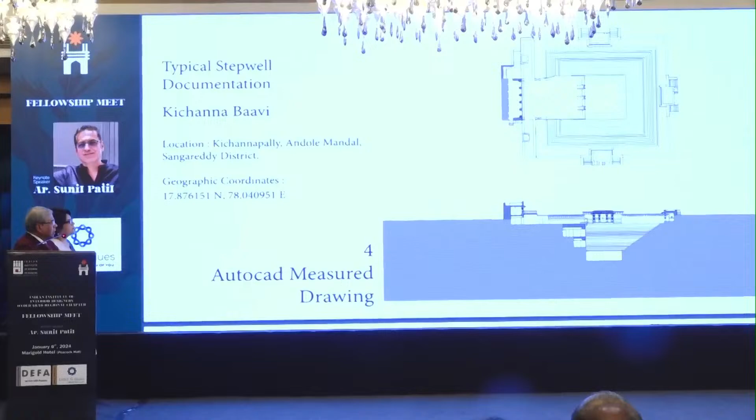We get the geographic coordinates. And the drone mapping in this case was done by IIID Hyderabad, and the 3D printing was done at the university. Then, of course, we make a detailed drawing, a typical measured drawing, plans, sections, all the details that we find, architectural details.

And then we have a comparative table of stepwell parameters. So this gives a lot of data, and all of them are listed under this. So this forms the nucleus of the research that we do.

And then we record some of the stories. Most of the facts that we got were actually first-hand from primary sources. And in many cases, we had no ways of corroborating them. But nevertheless, as people who are researching, we have recorded those stories.

So Aparna will take over from here.

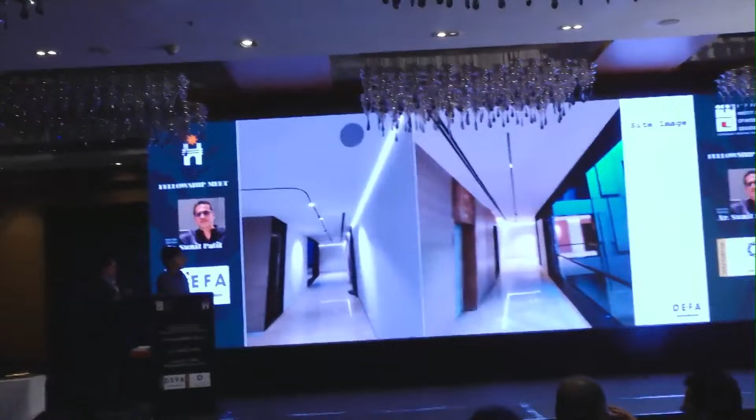These are some of the renders and the working that we do. On the right-hand side, we have the layouts; on the left-hand side, how it is actually going to come up. Some of the areas we have done, the concepts - these are the lighting design renders that we do. Some of the site images that have come up - these are all the installation images, actual site images that we have.

In general, we have various brands, approximately 40 brands from different countries across Europe, UK, Australia, depending on which kind of brand a client is looking at. These are some of the installation images of our corporate and commercial offices and spaces.

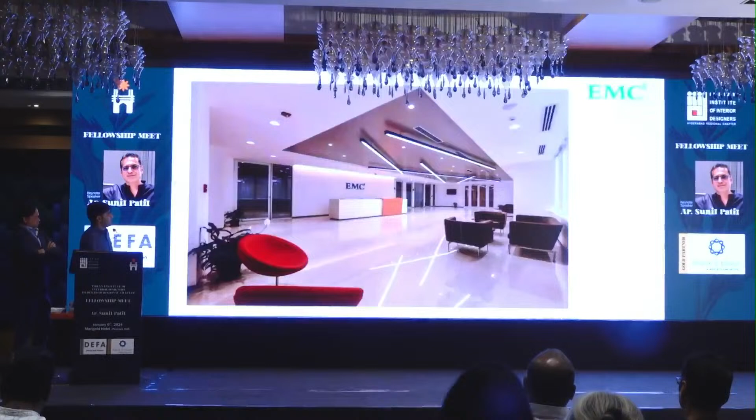We would like to showcase one video of an upcoming product. We have a manufacturing plant in Vasai, and our manufacturing company name is L-Code, which caters only to the brand. We have this video coming up showing the product lineup. Can I have the video, please?

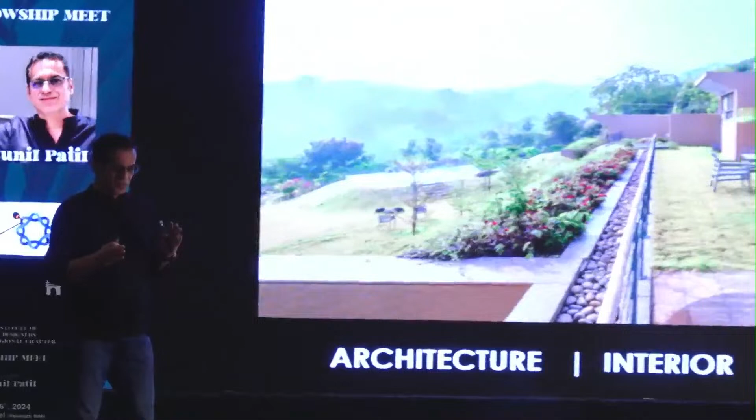As I said, it is very difficult for me to draw lines between architecture, interior, and landscape, because I think they have to complement each other. It's just one. So whenever I say architecture, it also includes interior.

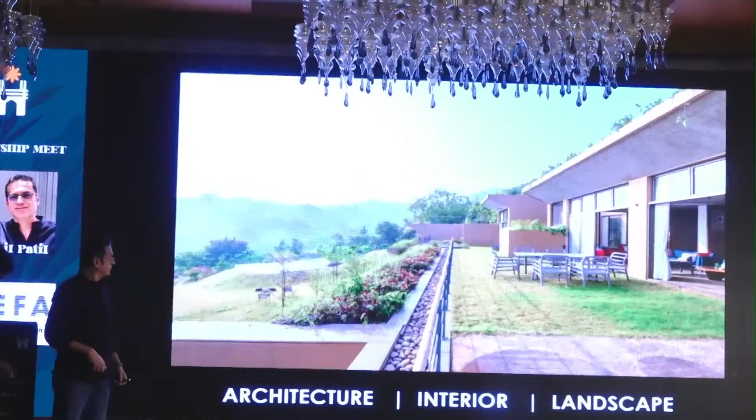So architecture is all about designing of space. And we believe that the space has to be in harmony with nature, because whenever you go to, for example, a multi-restaurant hotel, you tend to sit in an outdoor seating, however decorated the indoor restaurants are, because your body or mind tends to interact better with nature than man-made spaces. So we think the space has to be in harmony with nature. That's what our philosophy is all about.

When you design a space, you cannot conceive it without the thought of the interiors. Unless you know what the interior and layout are going to be, you cannot decide the fenestrations, where the space flows from one space to another. So I think every architect has to be the interior designer first. Without having the thought of interiors, you simply can't create that architectural space or form.

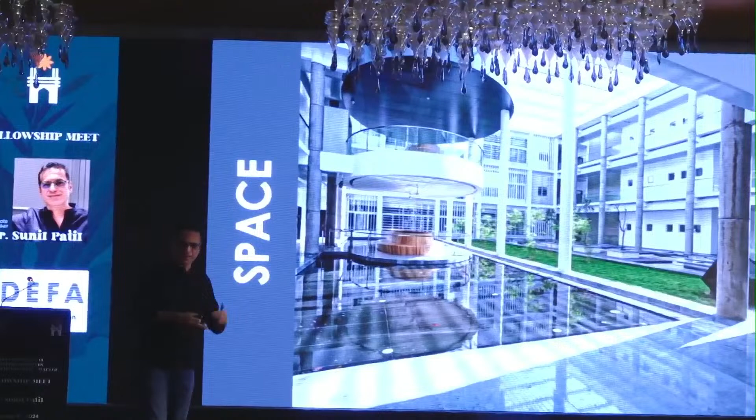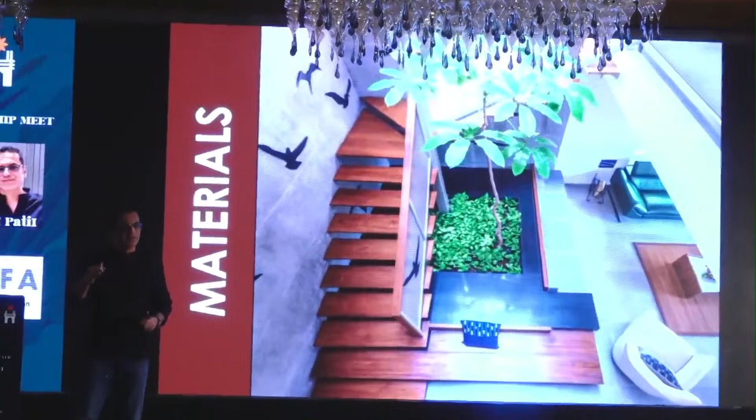And the materials. Now materials are very important. They give character to the space. It's just like music gives character to a film - imagine a scene like a night, a palace on the lake, with wind and breeze flowing. If you give romantic music, the scene will be romantic. At the same time, if you give horror music, the scene can be horror. Similarly, materials can make your space romantic or horror. So it is very important to choose the right kind of materials. That's the most important thing.

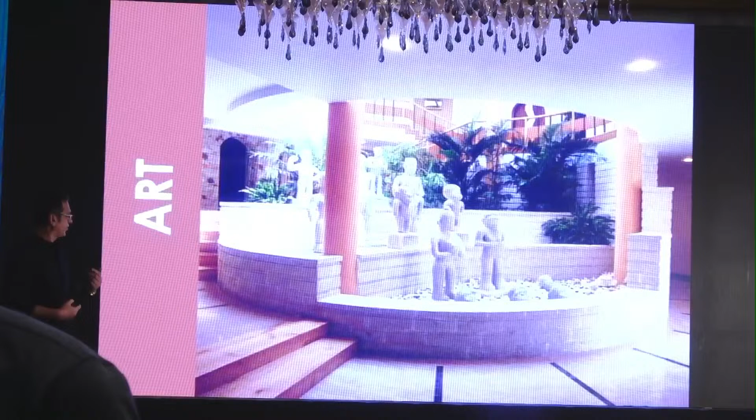Of course, sustainability - my today's talk is not about sustainability, but I would just like to say a few words about it. It is not rocket science to achieve sustainability in your building. If you just follow the simple basic principles of architecture which we've been taught in our colleges, I think you can achieve a lot of sustainability. So what is it all about?

It's about creating a comfortable space using minimum mechanical energy. That's what it is. If you just design with absolute natural light and ventilation, so that in daytime we don't have to really use mechanical energy, I think that's enough to achieve a lot of sustainability. But what happens is we cover everything, then we air condition it, and then we talk about generating energy from solar or wind. I think we have to look at that.

It is not about achieving those rating points by various rating systems. I think it has to be inculcated in the planning itself. Of course, we have also done a lot of projects which are 5-star rated by GRIHA or even IGBC, but sometimes for government projects, unless you stamp it, they don't accept that it is a green building. Otherwise, every building has to be a green building itself.

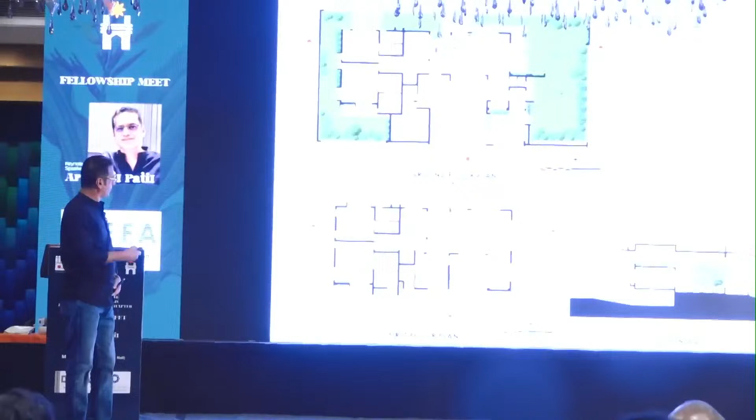This is a house in Pune, which we call the long house because the massing of that house is like that. It is a G+1 structure where the ground floor has living room, dining, and 2 bedrooms, and the first floor has 2 more bedrooms and family areas. The living room has a double-heighted volume.

So this is what it is. This is the front facade. Very simple elevation treatment, slick slabs with some penetrations, some punctures in that, and horizontal louvers with pine wood.

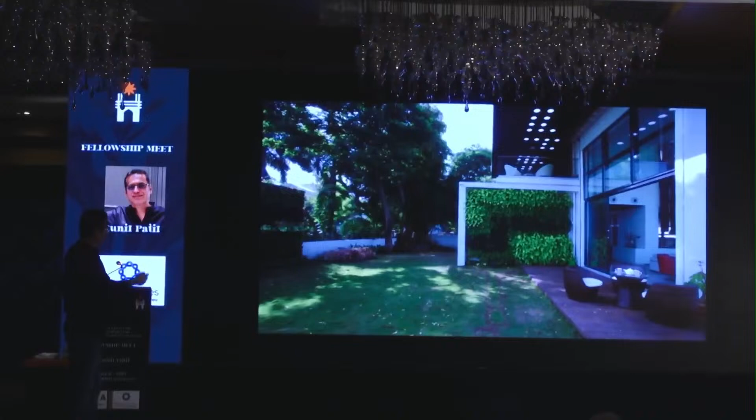This is the entrance. One more view of the garden where the living room walks out. This is the living room of that house with double-heighted volume.

Is this thing working? Yeah, let's check on this. Oh, because of that, I thought it was going automatic like that.

This house was very simple with gray color ceramic flooring with some patterns on that, and the double-heighted volume with large windows. When we treat double-heighted volumes, it's very tricky to treat the walls, so on the upper floor also we have taken some elements which come down.

This is one more view of that, the backside of the staircase. We wanted to have some kind of mural there. But then we got the idea that we could use old sari printing blocks, and it made a very nice mural for that.

This is the dining with kitchen and the breakfast table. On the other side, what you see are some curated artworks, which you'll see in the next slide.

Those are the curated artworks. There are 9 pieces of paintings which can be reversible and make different combinations.

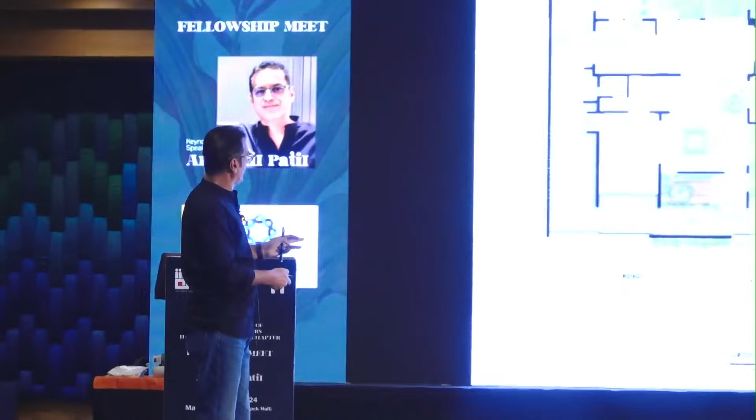So we call it stepped house because the house is staggered at the landing levels of the staircase, like steps. At this level you see living, family area, dining and kitchen, and the upper level has 2 more bedrooms with double height there. Above that are 3 more bedrooms, so there are about 7 bedrooms in this house with a terrace on top.

That's the front facade. We used Tandur stone cladding for the walls, and what you see are the horizontal louvers. You see the entrance is treated with wood, and the entrance becomes part of that huge wooden mural.

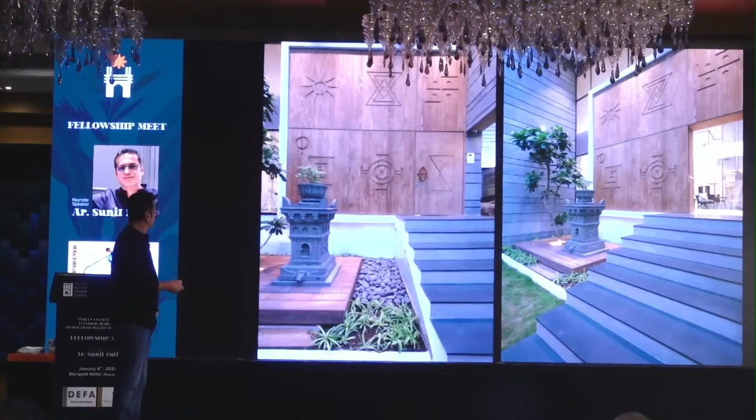That's Accoya wood, which is available there. That was the view from inside, how it looks - again a very simple plain ceramic tile with gray color in combination with wood and white masses.

There is a pneumatic lift here. Just showing a few more slides of that - that's the pneumatic lift which takes the family up to the top and the living area.

I love to have those spaces flowing from all directions, horizontal and vertical, through various fenestrations. This is one more view from the family area to the living room.

The plot was very small, so there was hardly any scope for a garden. So we thought of having a vertical garden on the compound walls, which gives that effect.

There's a dining area with walkout, and what you see is the compound wall with vertical garden. On the left side is the kitchen with this kind of breakfast table there.

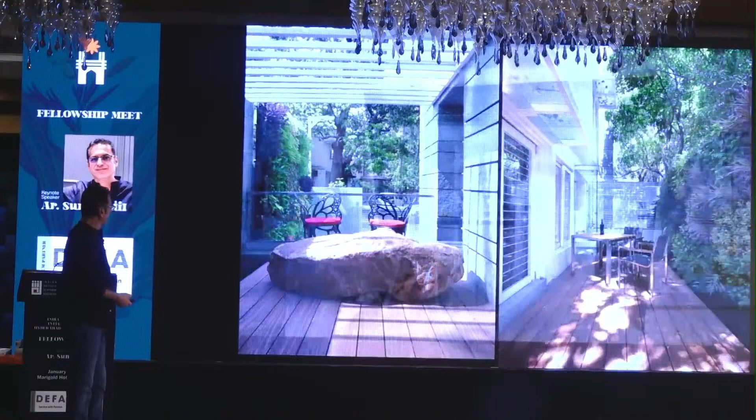And we used margins for landscape. That is the kitchen with this breakfast table - it becomes a nice feature there.

These are the setbacks which we used for gardens. And then, of course, treating those rooms was another challenge with different themes. So we used different colors for that. We made one blue room, and then...

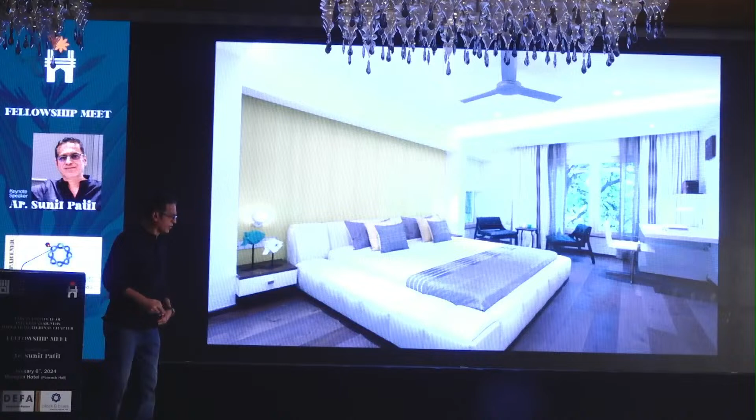Then a yellow room with very simple treatment, wooden flooring, and most of the artwork also matched to the theme of the room. So these are the themes of the rooms. There's one green, and you see that all the fabric is also designed to suit that room—the curtains, the pillows.

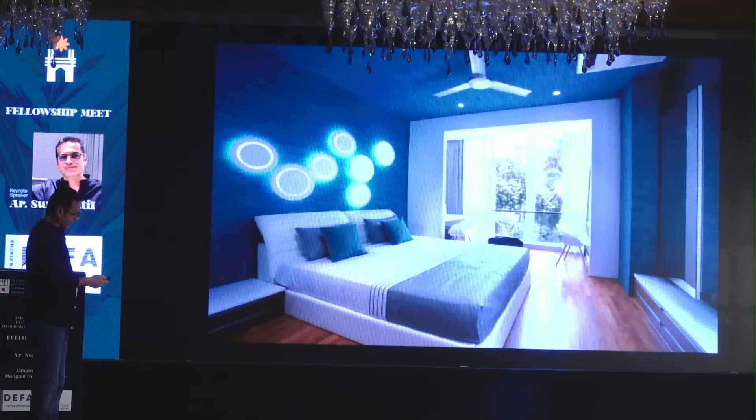Even our fabric designer has used the same pattern on the pillows as well. This is the uppermost terrace.

This is a very interesting project. We call it Earth House because it was supposed to be a weekend house on the outskirts of Pune. But Pune is growing so fast that by the time we built it, the client said he'll use it as his main house. And it became so good.

The idea was that it's on a hillock, a place called Bhugaon—most of you know Pune well. We did not want to disturb the contour of the hill, so we thought we could do something where the structure should not look like an alien structure just landed on that hill, not going with the natural surroundings.

So we thought of using the contour of the hill itself. Conventionally we could have done this differently, but we decided to design it such a way that it goes within the profile and contour of the hill, and it is not seen much.

That gave us a lot of opportunity to create courtyards and terraces. It is actually just a ground structure, but it has a huge, massive staircase because, as you know, it cascades down along the hill. This is the section and the terraces, shown in detail.

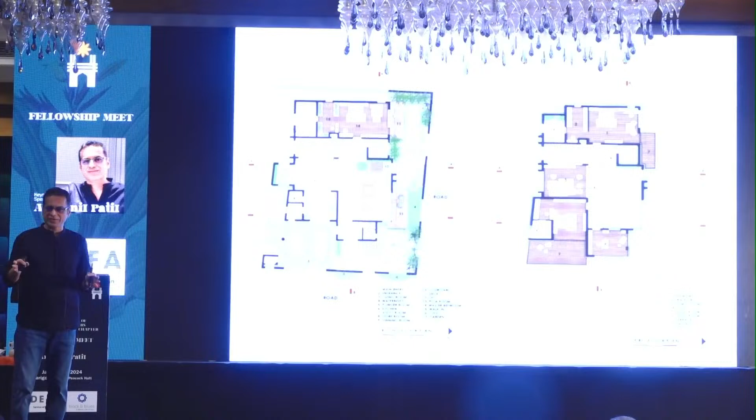This one more house I'm just going to show you. It's in Satara. It's a G+2 structure with again a similar kind of thing, having a small plot but more requirement - a typical requirement of a town or city. So we had to accommodate everything, and it has a G+2 structure.

We see that section. The living area has a double-heighted volume, but the courtyard continues with a green wall, a vertical garden throughout the height.

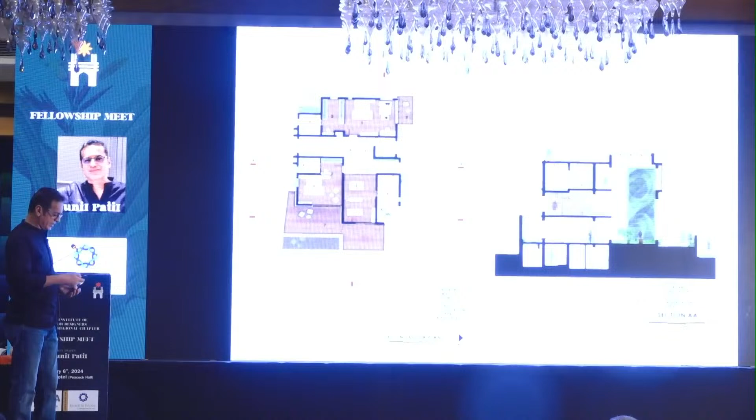So it is a very tricky thing in India - we have to have breeze inside but not that radiation from the sun. So I think in most of our projects we find some kind of sun breakers in the form of finishes, louvers or fins. This is the view of the living room with Italian marble flooring and more wood.

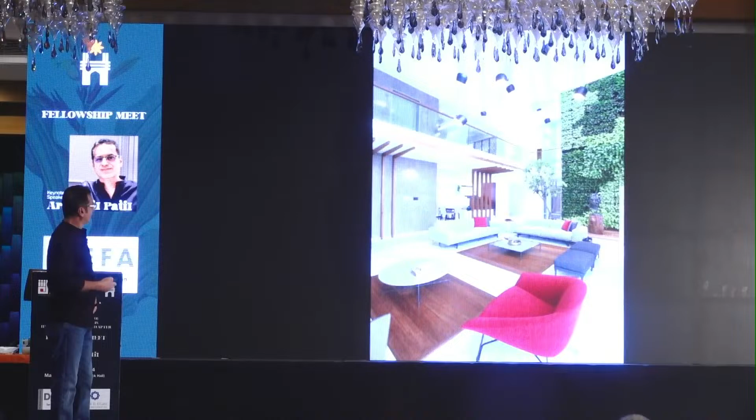Furniture is also imported here. And this vertical garden, which goes right to the top - we have been experimenting with vertical gardens for more than 20 years now.

So now we understood how to do it so that it doesn't dry up, because initially we used to get carried away by colorful plants, but it doesn't work for inside areas. There are specific plants - if you plant those, it works well. Just one more view of that.

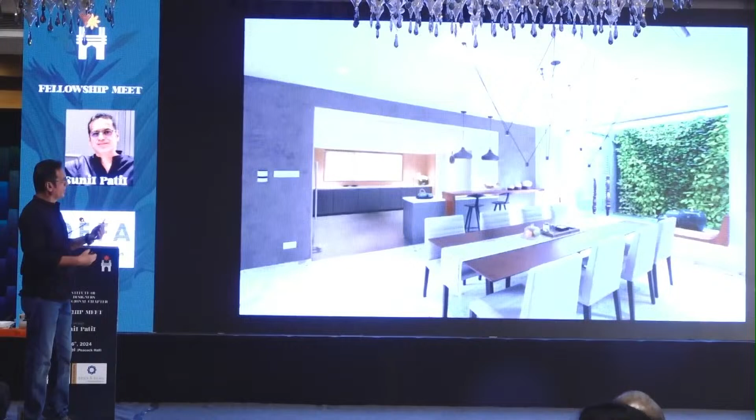That's the kitchen area. And then there's a nice staircase we worked on a bit, which itself forms a piece of artwork, with colorful wooden treatment to that. And that's the staircase which goes up.

The bedroom - we had a partition between the bed and the walk-in closet. There was a huge painting done on site by a very renowned artist called Sanjeev Sangpal from Maharashtra.

So this is another bed which has a walkout. This is the daughter's bed with some mirror on top and then some pink sofas.

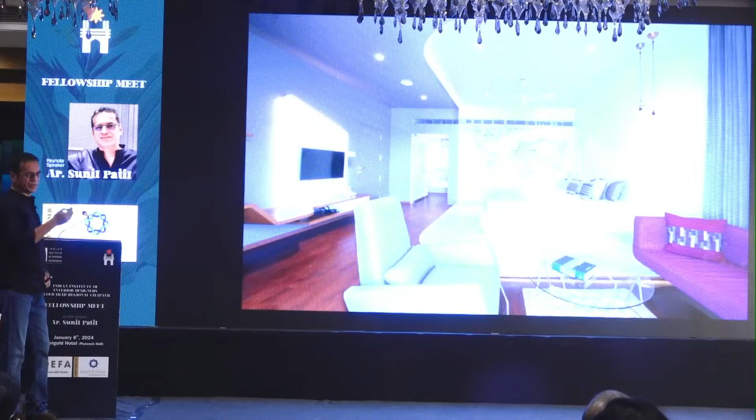The home theater - he wanted to have a home theater for almost 28 people. And that's a spa there.

Now this is our recently done project. See, if you see my presentation from about 20 years back, I used to show residences designed on 35,000 square feet of a plot, 50,000 square feet of a plot, and that is there in most of the books. But as I started my practice in Pune and we started working in metropolitan towns, the plot size reduced to 3,000 and 5,000 square feet.

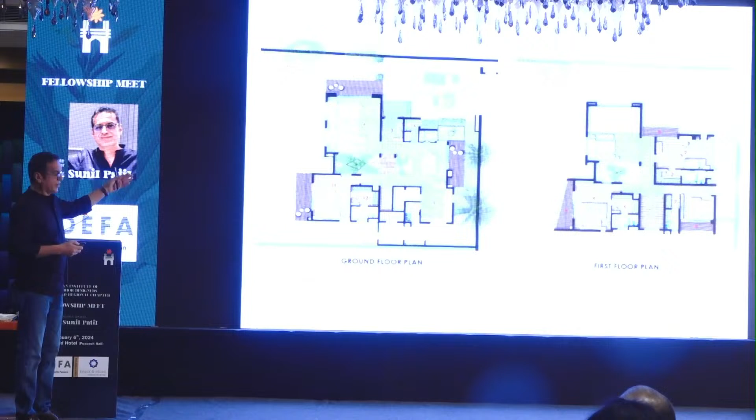We call it the house of floating masses because the masses are designed like that. There are three materials we used - one was stone masonry, the other was this strand-woven bamboo cladding, which works well for the exterior. Just another view of that.

Most of the structural work behind these very slick pergolas is because we have the engineering department. Most of it we have done in-house, because you know that if you go to structural design consultants, what their answer is.

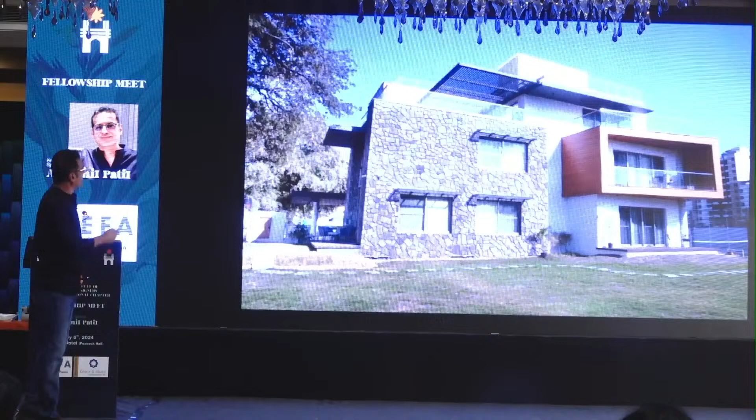This is one more view of that house. This is the view from the walkout when you look into the living room. The space we see is the family room, which again looks like a floating mass there. Just one more view of that.

This is from the other side, like you walk out, and you must be observing there are no grills. We have a lot of walkouts in most of our projects. Clients do insist on grills, but we came up with the idea of shutters which come down at night and are hidden in the elevation treatment, so they are automated with time.

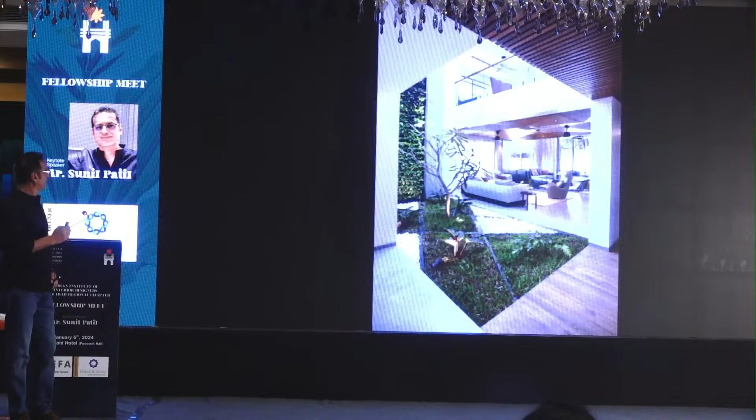Just a view through the courtyard to the other side. As I was talking about, I love to have this interaction amongst various levels through spaces.

Yeah, these were my residential projects. So now I'm going to show you some projects - this is an industrial project, which is also an award-winning project.

This is a winery for Fratelli. You must have heard of Fratelli wines - it's India's costliest wine now. It is an Indo-Italian wine.

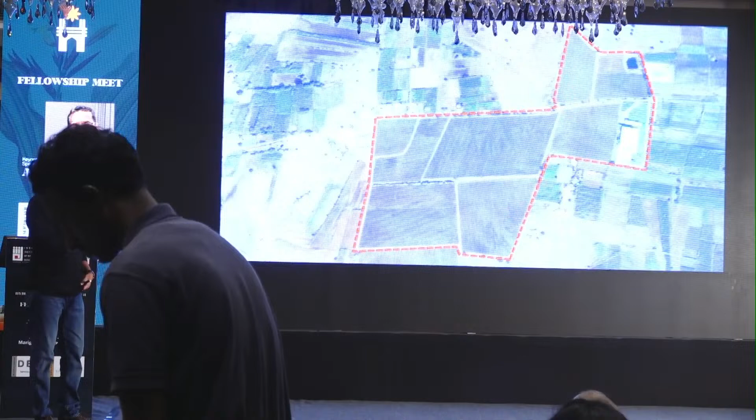So this is that 40 acres of vineyards, and there are another 100 acres nearby which is also connected to this. You know that the wine making process requires things like harvesting, crushing, fermentation, then aging and bottling.

It requires this: you need a tank hall, a bottling plant, and a cellar for wine storage. This has the highest capacity in India - it produces 9 lakh liters of wine every year.

Then the administration block with a wine tasting lounge and office, and we wanted to have a guest house because this place is out of nowhere - even if you want to buy mineral water, you have to travel about 50 kilometers. So we had our own guest house there.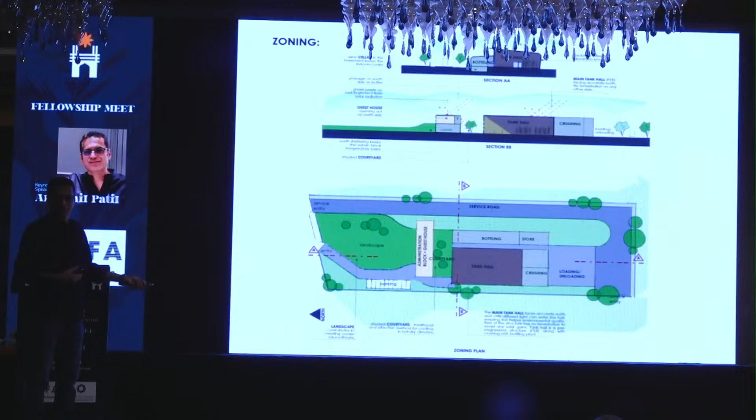The real challenge was that the tank hall is not air conditioned, but those tanks are jacketed, and we had to maintain that temperature, so we had just 3 layers of roofing there. We used technology to support huge spans with very sleek members, and we designed a corridor on the south side and kept the north side open, so it was climate responsive architecture as well.

So this is that winery you see from a distance. One more view - there is office below this.

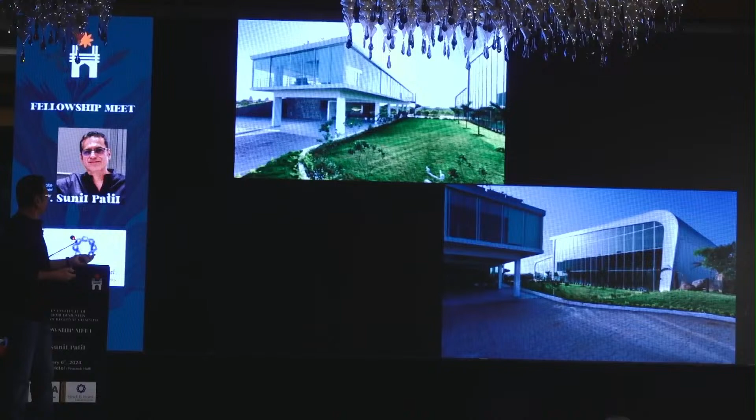Between the administration office and the manufacturing unit, there was a nice green space. The cellar was designed so they did not want direct access, because it's never like that. You have to go through something, so that they open it once a month or once in 2 months. That is the cellar.

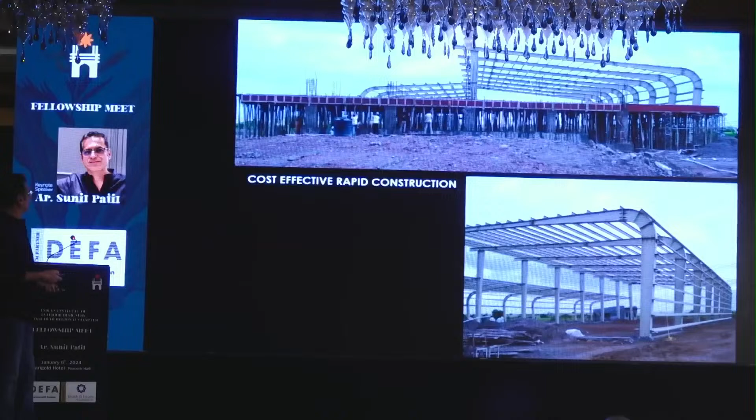As I said, it had to be done in just 4.5 months. We used PEB structures, and the superstructure was done in the factory while the foundation was done on site simultaneously, and the project was completed in 4.5 months.

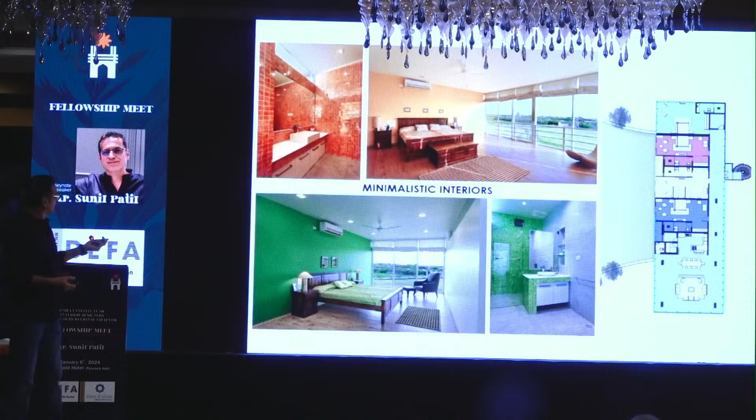The interior was very simple. They wanted classical furniture, which we never use in our projects, but since they wanted that nostalgia with wine, we got this furniture from Italy. The Italians are very conservative about spending, so it's not just India, but abroad also. We had to do everything in a very short budget, so only with some colors we made those things.

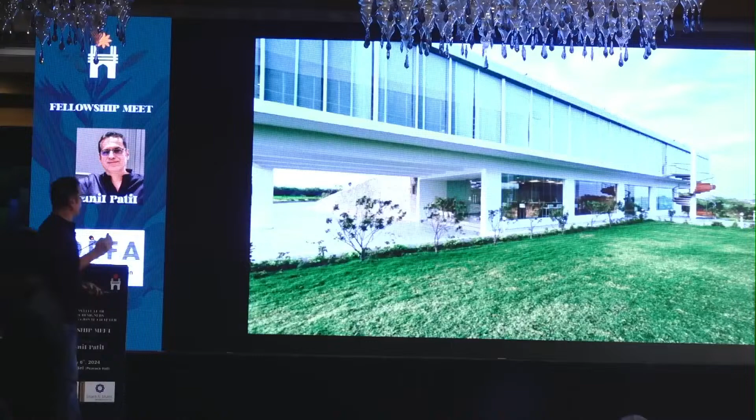This is the wine tasting area with simple Kota stone. That's another lounge on top of that, which projects out over the winery and vineyards. Just one more view of that. This is how it looks from the main entrance.

Actually, there is one very funny story. This was completely designed as a cantilever, and I'm going back to that. We completed this project.

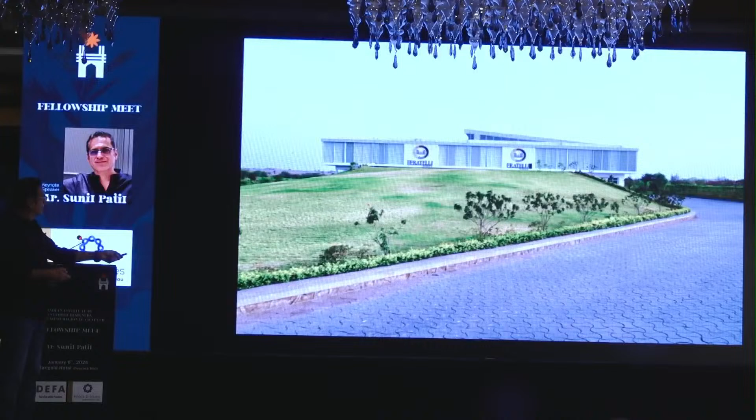This column which you see was not originally there. We completed the project, and after a few months, that client was behind me all the time. He said, 'put a support here.' They were feeling uncomfortable. I told him my structural designer had done it, don't worry. Then the project got finished, and I didn't do photography for 6 months.

After 6 months I sent a photographer, since I couldn't go myself because I was busy. He did the photography and showed me the photographs, and I was shocked. I said, these columns were not there. I called the client and my structural designer, and he said they were insisting on it. Look at the column size also, it's very funny, see.

So it's a psychological column. At night, it looks like this.

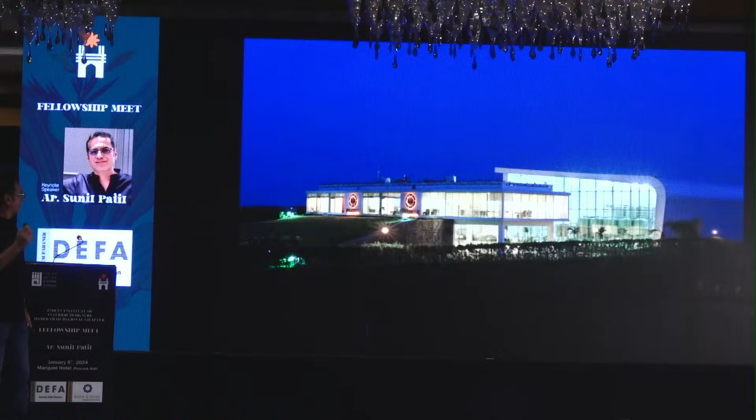Shimmering wine. So this is a government project, a circuit house, VVIP circuit house, which we did in Pune. You know what a circuit house is all about. It's a big challenge. When you think about a circuit house, what comes to your mind?

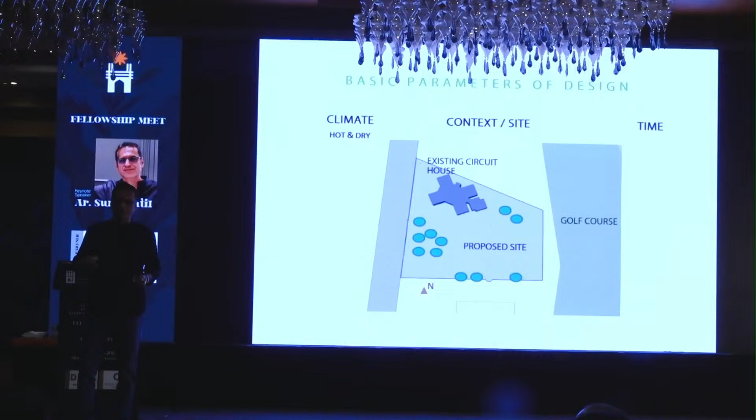A lot of chaos, a lot of people, VIPs, bureaucrats, security guys. When some minister comes, the entire entrance area and porch is flooded with people and it's a chaotic situation. We wanted to avoid that. So we worked a lot on the circulation of bureaucrats, ministers, security personnel, and the public as well.

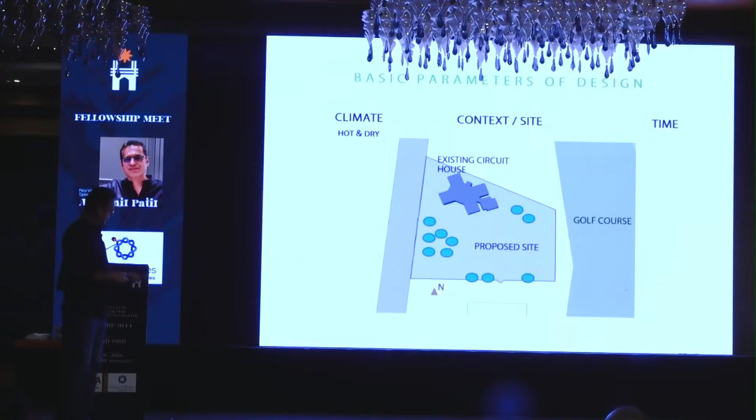So this was the site here. One side was a golf course. This is a very prime location in Pune camp area. This was the existing circuit house, designed in a post-modernist style, and this was the proposed site for us. There are a lot of trees around also. And then this was the site.

As you know, you require the marginal space for fire brigade movement. After that, this is what we could get as footprint. We did not want to disturb these trees, so we decided to build only in this area, so the footprint was not much.

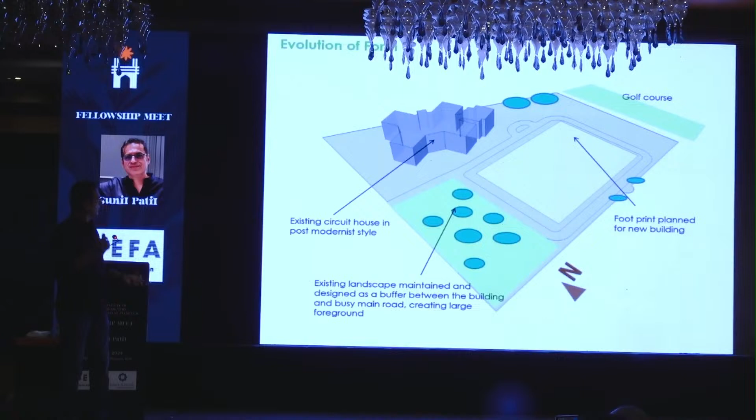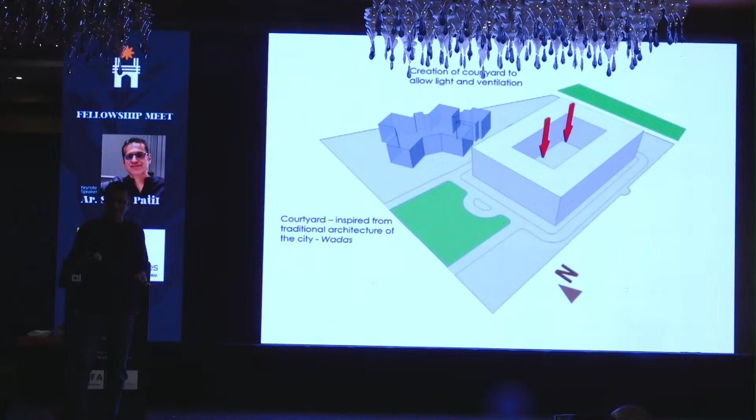Then we decided, when we create a block, that we do not allow any space to be more than normally 8 meters from the exterior face, because light travels 8 meters normally. So it automatically created that courtyard for this house. Again, the courtyard is a vernacular feature, an ethos we have been using in India for ages, for various reasons we will talk about.

Then we just cut it from the west side, because the west side is normally very harsh, so if we can avoid any function facing west, we should do it. So we did that. And then there are 3 vertical cores.

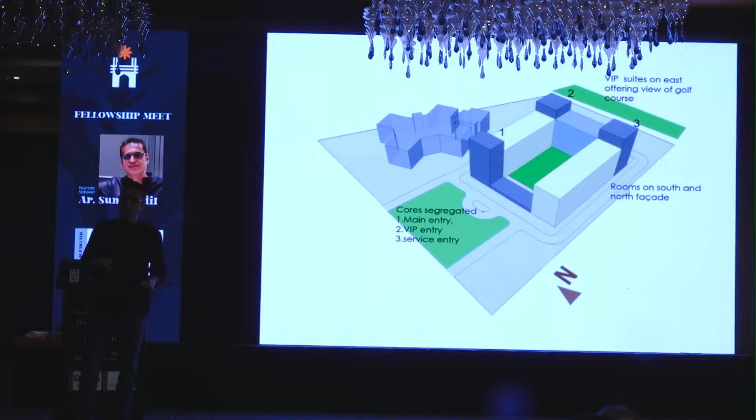This was the VIP core because there is a helipad on top of that. The idea was that when ministers come, there's a lot of wastage of energy, labor, and fuel, because they come with a huge convoy, and 10 to 15 officers are unnecessarily employed there. So we presented to the collector that we will have a helipad here, so he comes by chopper and just goes, and the city doesn't have any pollution, and whatever risk of flying is his own. He was convinced, because the collector is the first person to go and welcome every minister, and then we got this done. You'll see that later on. So all the rooms were actually located on the south and north facade.

Sorry, just going in reverse, yeah.

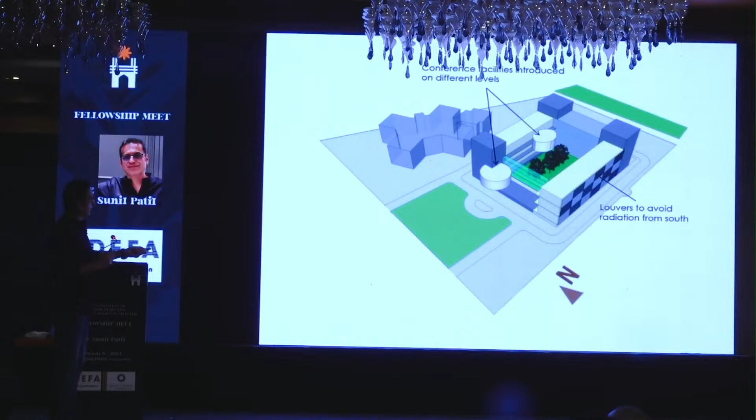We had some connecting bridges which were connecting these two wings, and then there were two conference halls of different capacities, 20 and 40. When we work with government projects, another challenge is that the brief from the government can come anytime, even after constructing half the structure. So this is what happened with this project, and we could still do it.

This courtyard is not a new concept at all. It has been there in most government buildings, if you see the old British era, because it works very well for various reasons. It gives additional space for waiting, because however much waiting capacity you design for government buildings, it's never enough in India. There's always irregular occupancy in this kind of building - sometimes there are 50 people, sometimes 500. So it's difficult to design covered waiting areas, and these courtyards can take care of that.

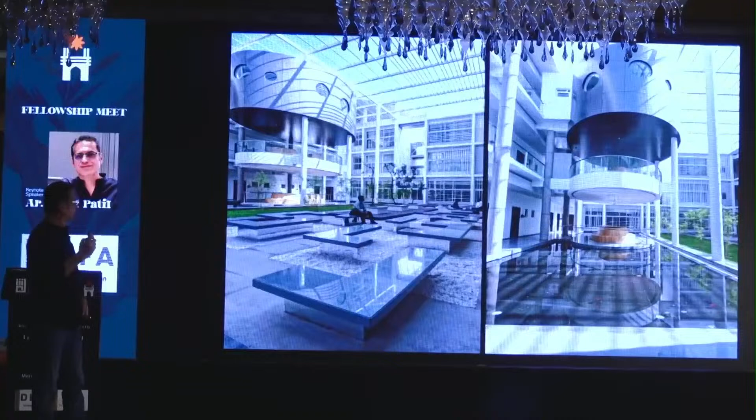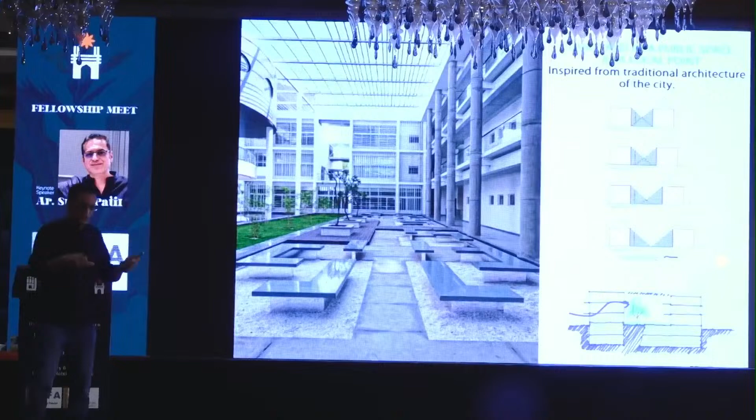So these are the courtyards I was talking about - they help in accommodating additional waiting space. It was carefully planned to ensure it remains shaded for a longer time throughout the year. So it's very important to understand the proportions, and the width-to-height ratio, if you want this courtyard to serve a functional reason.

There's a water body there because water bodies normally create a microclimate - they add humidity to the space. Just another view - there are two sleek bridges which connect them.

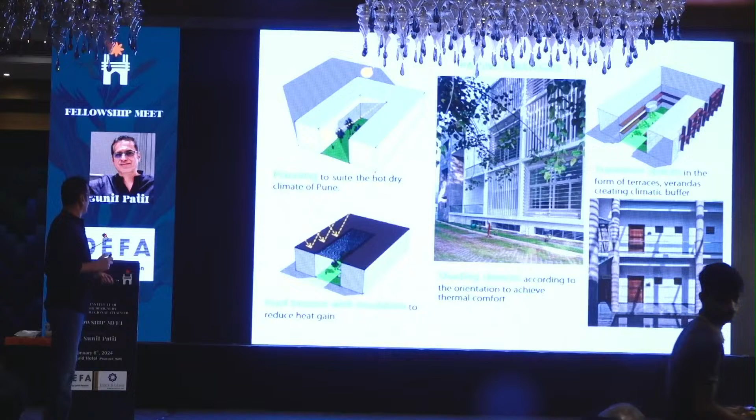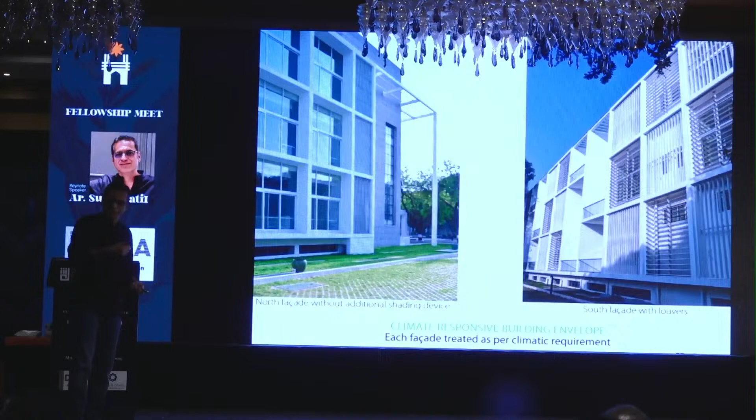Now you have to understand that this is a PWD project, so we used a lot of passive strategies as well. We treated the roof with insulation, and the planning was done in such a way that it takes care of hot dry climate. We used louvers as shading devices for various facades differently, as per the climatic demand. The south facade was treated like this, and the north had some glass - of course north also gets a little bit of radiation, ambient heat comes from there, but this glass can be used with some particular specifications.

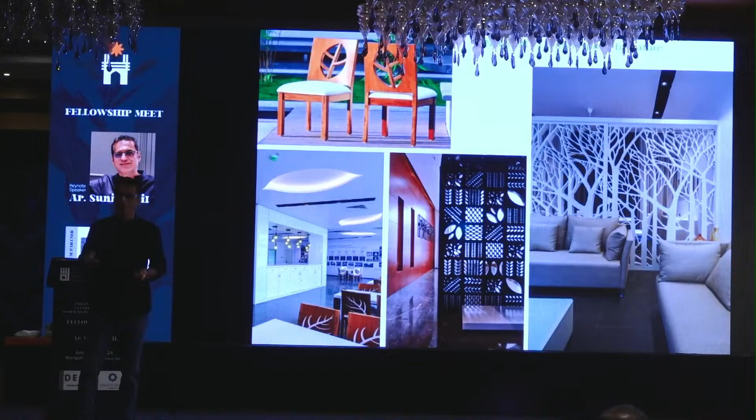For the interior, we also wanted a theme of nature - save nature, save our environment. That theme was used for interiors as well, and it also gave us a lot of innovation points from GRIHA's perspective as a green building. So if you see, motifs of nature have been used throughout most of the interior here. About 230 artworks are used, done by about 30 artists from various places, given a common theme - go green, or you cannot survive without flora or fauna. With all these themes, they created this artwork, and in most of the places you will see it.

This music is not running. There's music after this, I think it's missing.

I have removed most of the slides which were about sustainability because this project itself was about a 45-minute talk, so I had to really cut it short.

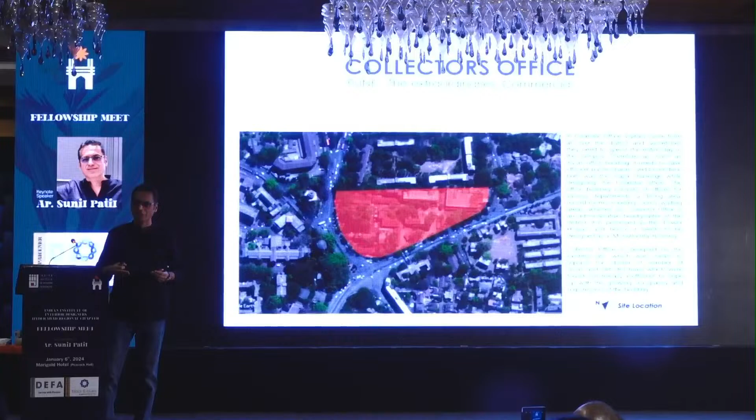So this collector office is a very interesting project. When I finished this circuit house, the Deputy CM was impressed with our work, and the collector office project was stuck for a long time - almost 4 or 5 years - because the proposals that had been finalized required cutting about 120 trees, huge massive trees about 50 years old. In Pune, it's not that easy - if you have to cut even two trees, the matter goes to the High Court. So the project was pending and held.

The Deputy CM invited me and said, can you do something where we can avoid this? I said, I will try.

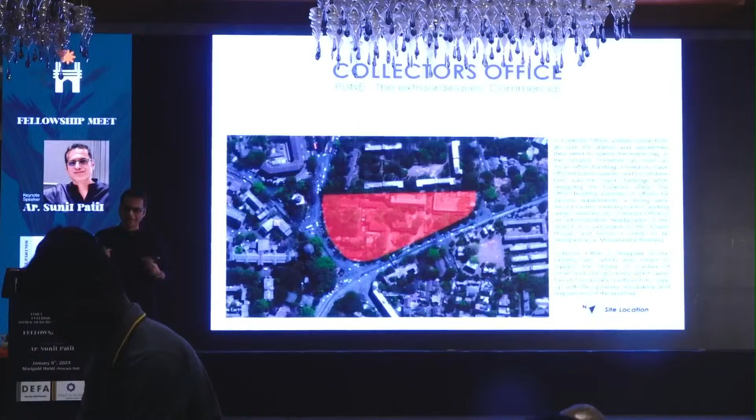Previously also good architects had worked on that, so we started working on this project. That was the area, and this original collector office was already there, but it was in fragments, like small buildings, and it was very difficult for them to operate like this. So they wanted to build one massive structure, about 2 lakh square feet, which meant a parking requirement of about 300 car parks.

That's the requirement for 2 lakh square feet in Pune. They demolished the structures, and this is when we came into picture, and these trees were to be saved. If we had gone conventionally, like most architects had done, we would have to go for a basement, forcing us to cut the trees. So we didn't do that.

We dropped that idea and located a few areas where we could have these structures, and decided to have a parking building separately. Since it's a government project, we did not want vehicular elevators because that doesn't work, so we used proper ramps instead. We thought we could have the parking building here, and these two wings could be office wings, and we went on developing it.

This saved most of our trees. Out of 120 which were supposed to be cut, we saved 112 trees. The other 8 we said would be shifted, but that never really happened properly - they were shifted, but whether they survive or not is unclear. At least we could save 112 trees because of this solution.

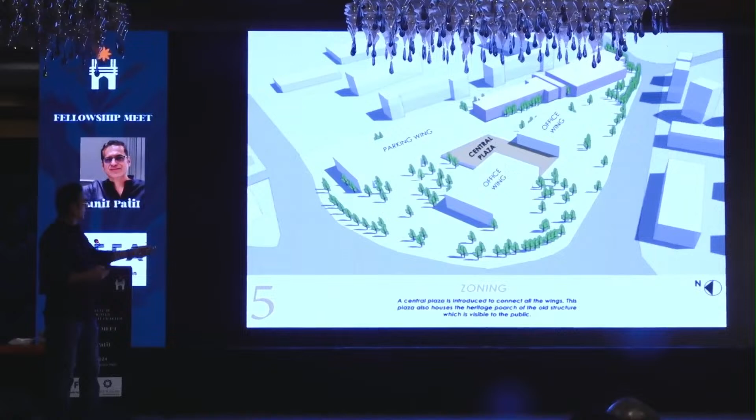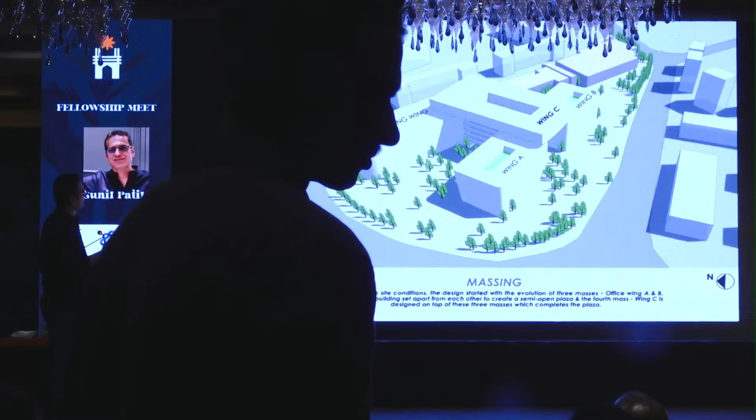So we created a central plaza, and again with our process, we created courtyards there - these are 2 office wings with central courtyards. Then we connected them. The parking building is connected by bridges, and these 2 wings are also connected by bridges. The idea was that since the parking building rises with the office floors, officers can park their vehicles on the same level and simply walk.

They don't have to use elevators, so that's also an energy saving feature. We did wing A, wing B, and then on top of that we placed another wing - that was the collector's office, where the collector sits. So this is how it happened.

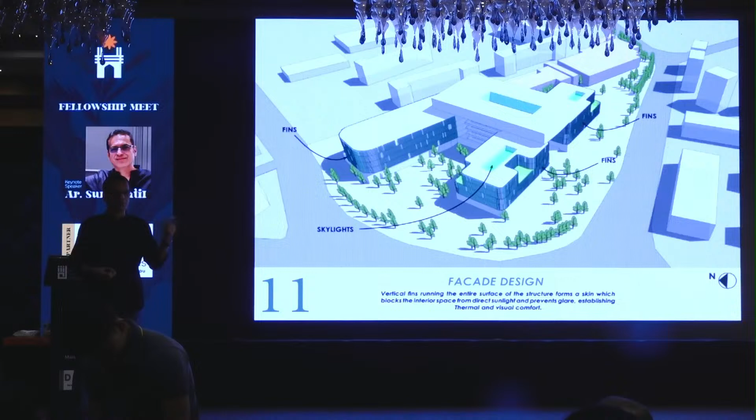Then we used fins to cut radiation. Fins is a very old technique, but the way it's used here is very contemporary. We had some skylights which gave us a lot of benefit. This building is 2 lakh square feet, out of which only 10,000 square feet is mechanically air conditioned - the rest is naturally ventilated, with enough natural light too. The best part of this building is that people working there are very happy.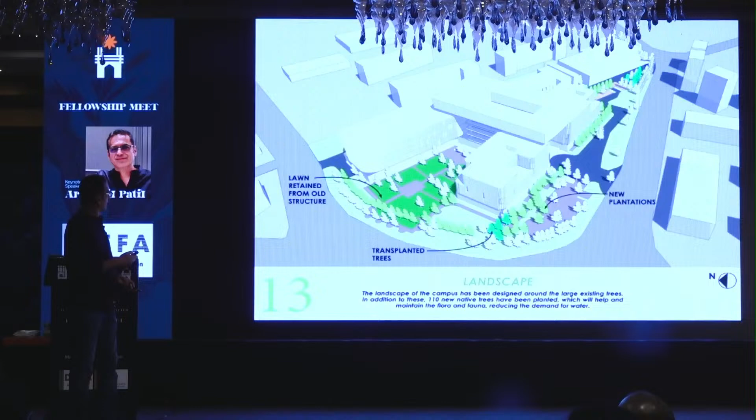This building doesn't require any electricity from MSEB. We generate our own energy on solar, so it is 100% autonomous for electricity.

There's one more thing - when they demolished this structure, the Heritage Department put up a condition that you have to preserve this porch, or rebuild it. Now just imagine, their condition was the new building should have the same porch. The funniest part was that this porch was for a 6,000 square feet building, and the new building was 2 lakh square feet. Just imagine this porch for 2 lakh square feet - and most of the competitors had actually done that because it was a condition.

So I said we are not going to do it that way. You want to preserve this porch, we will do it, but it will be kind of a monument in the central plaza. The Heritage Committee was convinced - they said fine, as far as you are retaining it or rebuilding it, we are fine with it. We designed it such that in the central plaza of the building, it becomes a monument. We removed the plaster and got back the original.

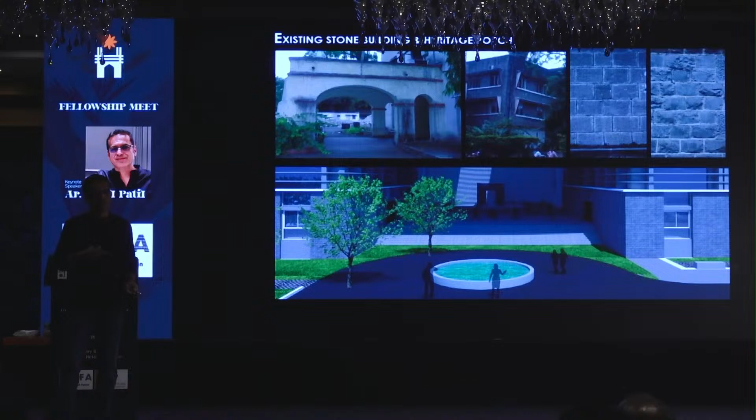Whatever buildings we had demolished, we used all that stone - if you see the collector's office, the ground floor is completely in stone masonry, using that old stone. Of course we had to buy some more, but we used the maximum of that stone for this building. So this is the central plaza where we rebuilt this porch, and this is the building.

As I said, we do artwork in every building. Here also we did a huge mural, about 8 meters by 8 meters, to give a message to people that let's join hands to save our environment. It's a tree made out of hands - so we gave that message here as well.

So this is the facade. This has been featured in many books also as a climate responsive facade. Because once you have the fins, inside you can have regular aluminum sliding windows. And we have the courtyard on the other side, which gives that cross ventilation, and the stack effect is generated. So this is the front facade, where you see that this is projecting out by 9 meters, which was a big task. And this is about 24 meters.

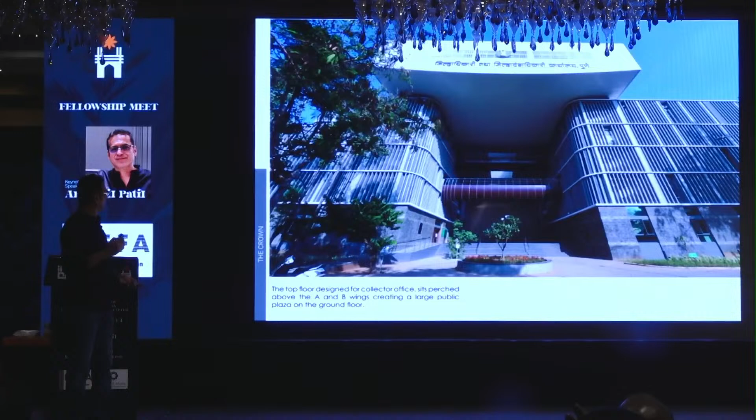So this is that from closer. This is another view of that. This is what I was talking about. So it really works well.

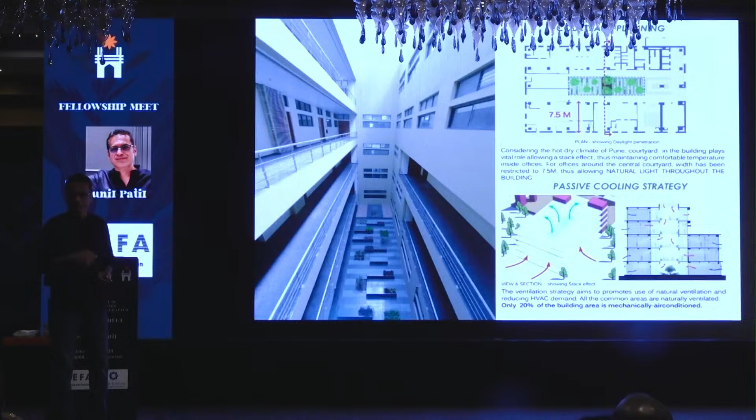We have these turbo ventilators here, which are again not driven by mechanical energy. And it actually works. Initially, what happened was the peons used to keep those windows shut. We had to go, our staff had to go and educate them: no, don't do that, that doesn't happen, the air currents will not flow. So that is another thing, you need to educate operators as well if you design green buildings. So post-occupancy visits are very important.

So again, there are two courtyards for two wings. This is what I was talking about, the air. It actually works, it is not just a diagram. We have experienced it ourselves.

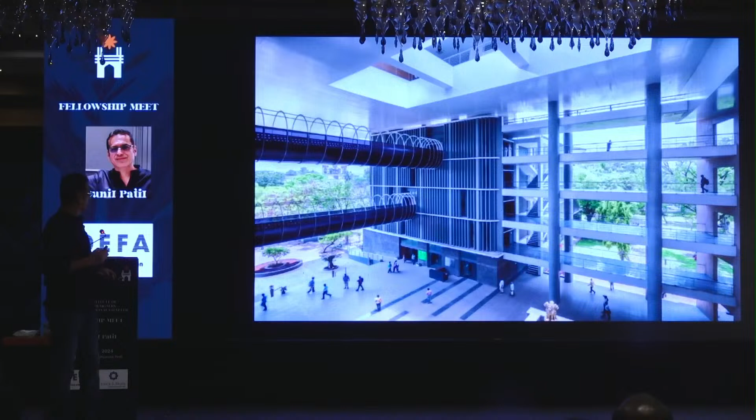So these are the bridges I was talking about, spanning about 24 meters. It's a composite structure. Just another view of that from top. From this, you can understand the scale of the bridges.

I wanted to have this entire building in PT, pre-stress rather. But then PWD was not ready, because they wanted maintenance, since you need to tighten those things periodically. PWD had recommended 8 columns in this central plaza, which would have just spoiled everything. So there was a big argument, and we said no. We were ready to give up the project.

The matter went to the chief minister, because at that time, this was done in 2015-16, and all these projects' architects were appointed with the permission of the chief minister as green building consultants. So the matter went to him, and we said that our structural designer is giving in writing to the local authority, so why should PWD object to that? The CM said yes, that's right, let them do whatever they want as far as they are taking the responsibility on paper. So we could convince them not to have those columns.

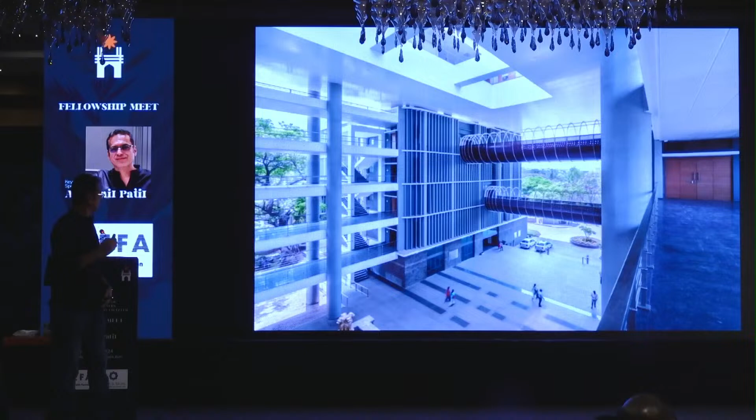Otherwise, imagine this central plaza with 8 columns like this and 8 columns like this, 16 huge columns in the central plaza, about 3 feet thick. But then for the top floor, we used that PT. So this is another view of that.

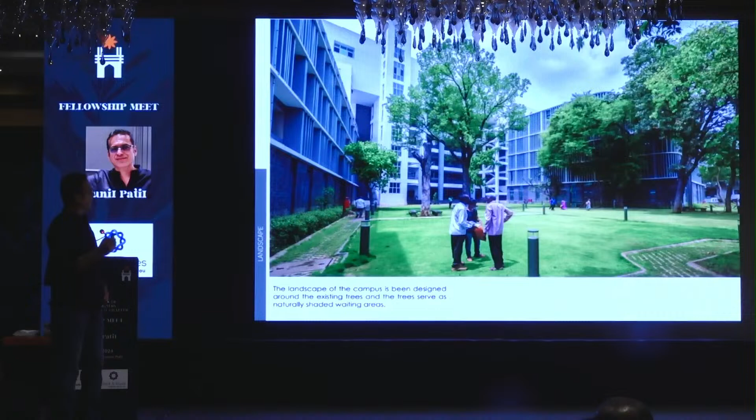So some of the trees are very, very close to the building. At one place, I don't know whether that slide is here, but it's not here - at one place we had to redesign our building, cutting the building, and we changed the shape of that building.

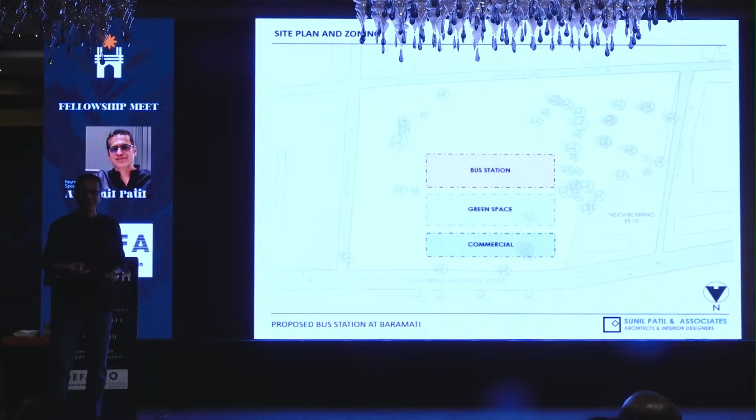This is the main road, there's another road for buses here. Presently, there was already a bus stand there. We call it a bus station because it's supposed to station about 100 buses at night as parking in that area. Their idea was that they wanted some revenue generating model, they wanted to earn because it was a main road. So they thought let's have some commercial establishment in the front and the ST stand, or the ST station, bus station at the back. You know how these commercial establishments on ST stands are - nobody is ready to buy because of the ambience they create. So it was a big issue.

Then we thought of an idea - let's have a huge green space in between, so that the two zones are segregated. So we gave them this idea that the bus station is here with buses parking, bus movement will be here, and this main road will have commercial shops plus offices on top of that.

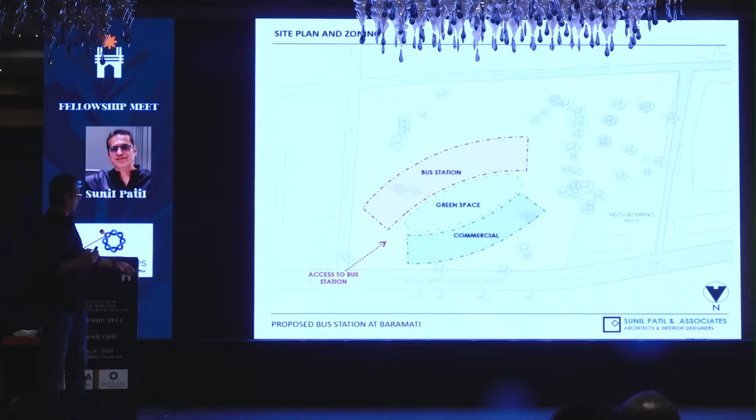And then with that we started working on it. We thought access was important, so we turned it a little bit like this, so that visitor access to the bus was the most important thing, and buses will come from here. So this is how the designing started with other requirements. This is the simple plan with a huge landscape courtyard in between, the bus stand here, and commercial development here. And this is the entry for the bus stand.

And another thing, we used two floors here, and their requirements were also housed on the back side. So this was the idea: the bus stand, the huge central court, and the commercial establishments like shops and offices on top of that.

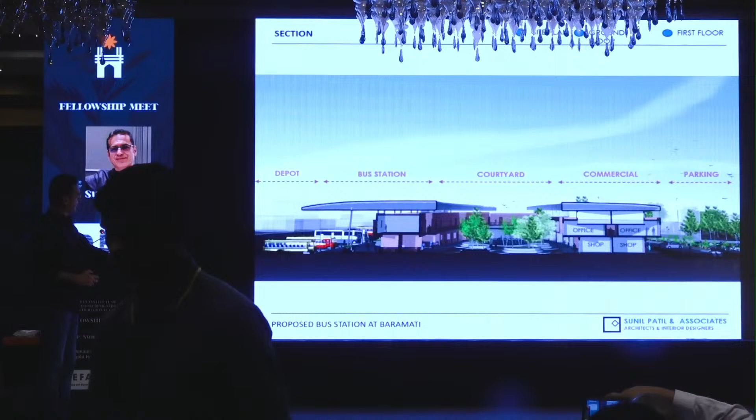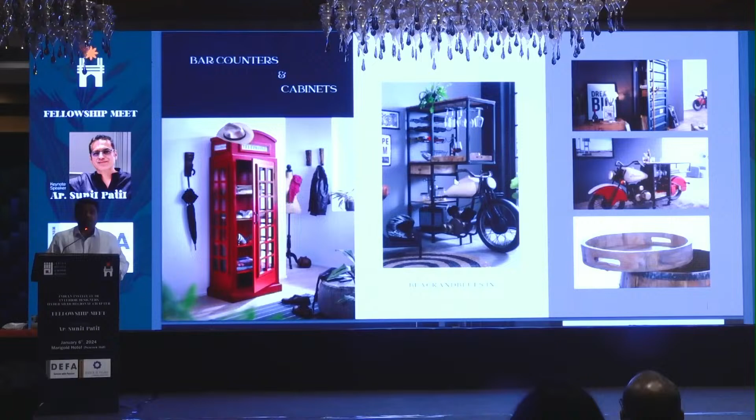Our core competency is office chairs. We have more than 250 products to choose from. All our chairs are ergonomically designed, whether it be staff chairs, executive chairs, or premium executive chairs—we have it all under one roof.

One of my favorite products is the accent chairs, or standalone chairs as we call them, for your study or living rooms. We have a lot of chic designs to choose from.

All the sofas we make in-house. Apart from the standard designs, we also customize sofas as per client requirements. We have Korean stitching machines, so the finish you find with Chinese sofas, we can replicate in our own factory with better quality.

We have ventured into Horeca furniture as well, whether it be bar chairs or outdoor or indoor chairs—we have got it all covered under one roof. We also do workstations, desks, and storages. We are blessed to have a hardworking and dedicated team of 75 plus employees.

65% of our product portfolio is of Indian origin. We are not just an import-only company. We give a 3-year warranty for all our products. We have a dedicated service team wherein the turnaround time is just 24 hours. And we directly import from Southeast Asia.

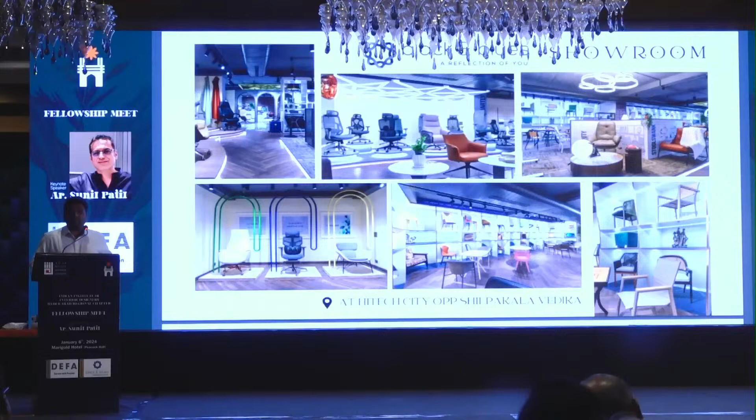There will be 40% less food for 9 billion population by 2050. So we at Black and Blue support the Save the Soil movement initiated by Sadhguru. And we are also participating in the Acetech and INDEX show, so would love to host you all there.

And lastly, we are a young company with a lot of aspirations. So we would like you all to be a part of our journey in taking this company national and international someday, so that we can leave a legacy for more young people like us to follow and be inspired by. Thank you.